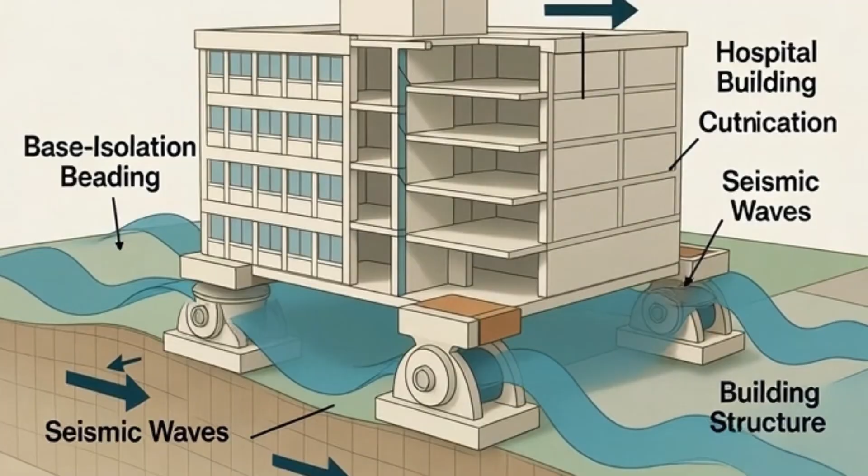Japan is often described as the safest country in the world when it comes to earthquakes. Its cities are filled with flexible skyscrapers. Hospitals sit on base isolation systems. Buildings are designed to move, not to break.

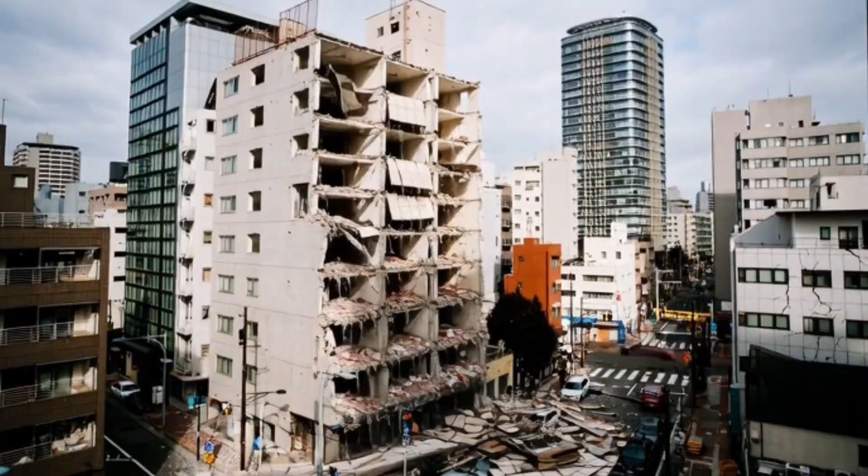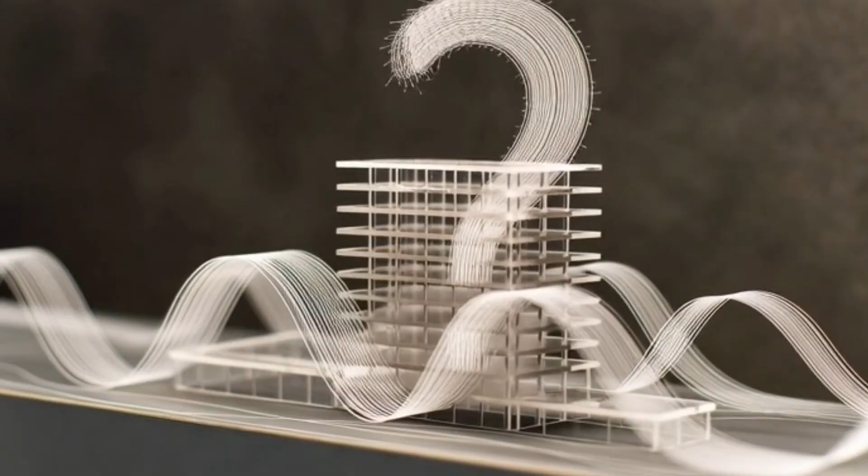And yet, after major earthquakes, we still see damaged buildings. We see hospitals that cannot operate. We see infrastructure that stops working. So this raises an important question. If Japan has some of the most advanced earthquake-resistant designs on Earth, why do these systems still sometimes fail?

This video is not about blame. It is not about disasters. It is about engineering reality, the limits of design, and what Japan teaches us about how failure really works.

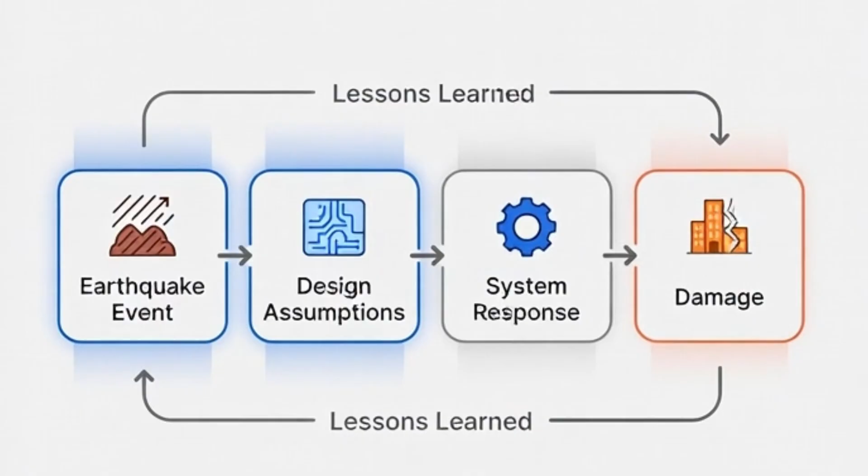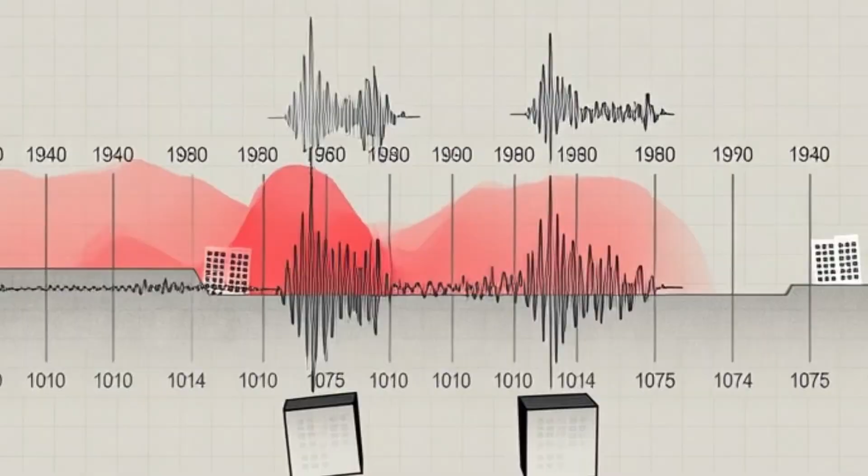Japan sits at the intersection of multiple tectonic plates. Earthquakes are not rare here, they are a regular part of life. Over the last century, Japan has experienced some of the most powerful earthquakes ever recorded. Each one left behind damage. But more importantly, each one left behind data.

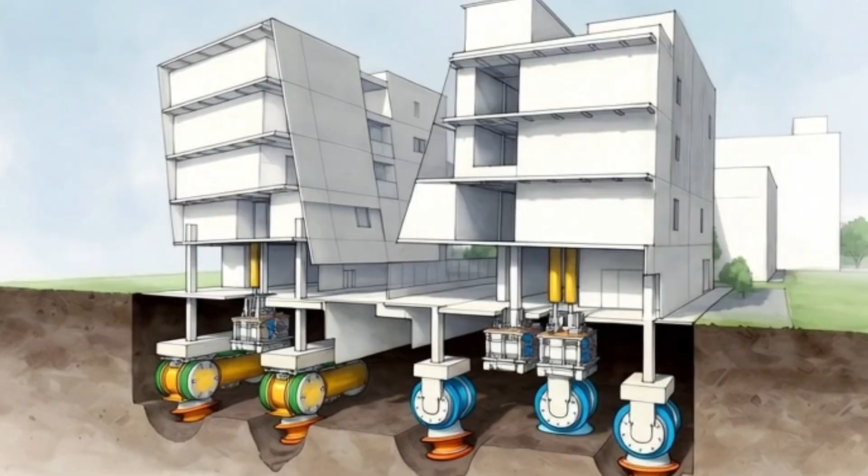Japan chose a different path from many other countries. Instead of trying to avoid earthquakes, Japan chose to engineer for survival. That decision shaped modern earthquake engineering around the world. But leadership does not mean immunity.

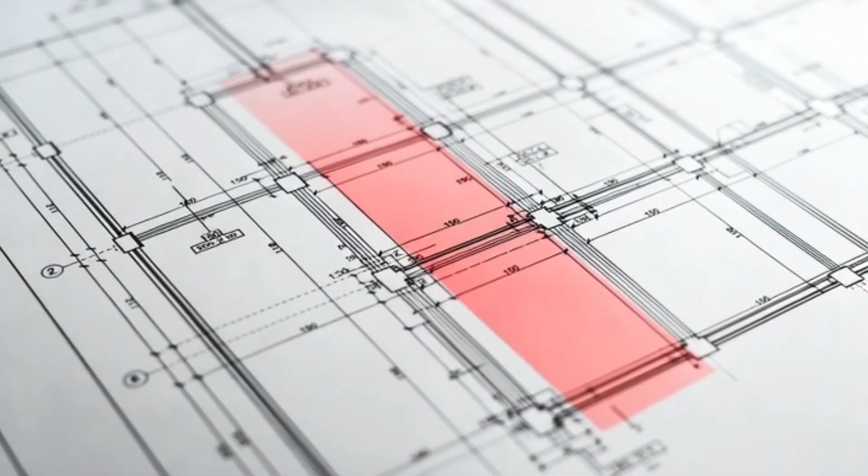Many people believe earthquake-resistant buildings are designed to remain undamaged. That is not true. Earthquake-resistant design does not aim for zero damage. It aims to prevent collapse. It aims to protect human life. It aims to give people time to escape.

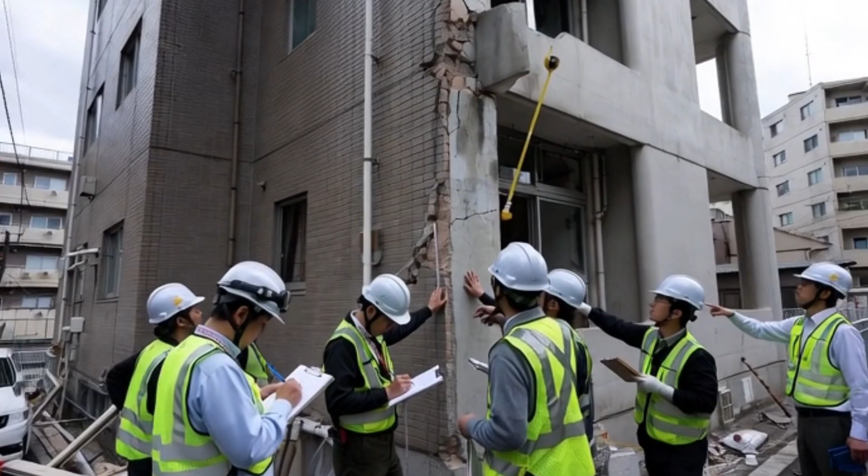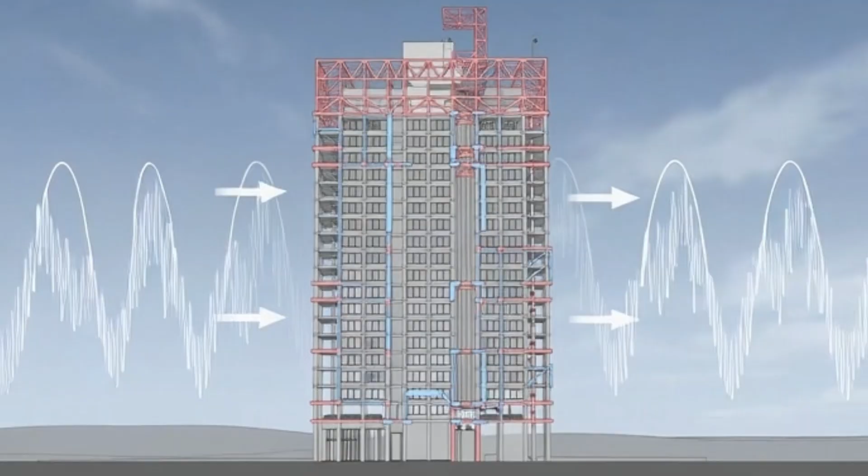Engineers accept that damage will happen. What matters is how that damage happens. Buildings are designed to bend, to absorb energy, to deform in controlled ways. Cracks are expected. Movement is expected. Collapse is not. This philosophy is written directly into Japan's seismic building codes. In simple terms, earthquake-resistant does not mean earthquake-proof.

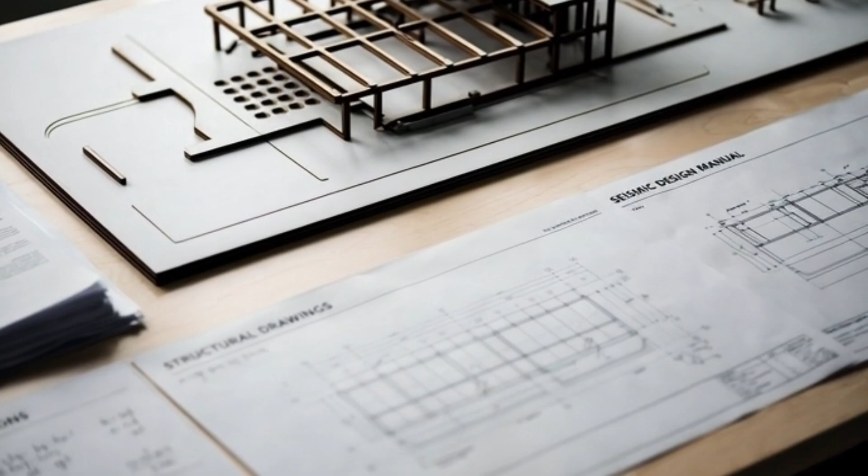Every engineering design is based on assumptions. Seismic codes define a design earthquake. This is an estimated level of shaking based on probability. But earthquakes do not follow averages. Some last longer than expected. Some release energy in unexpected patterns.

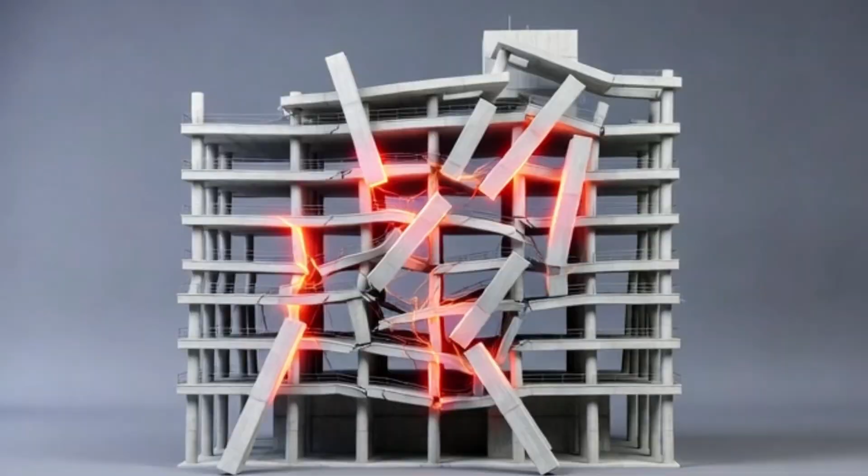Some exceed historical predictions. When that happens, buildings experience forces they were never meant to handle. This does not mean the design failed. It means the event exceeded the design envelope. Engineering manages risk. It does not eliminate it.

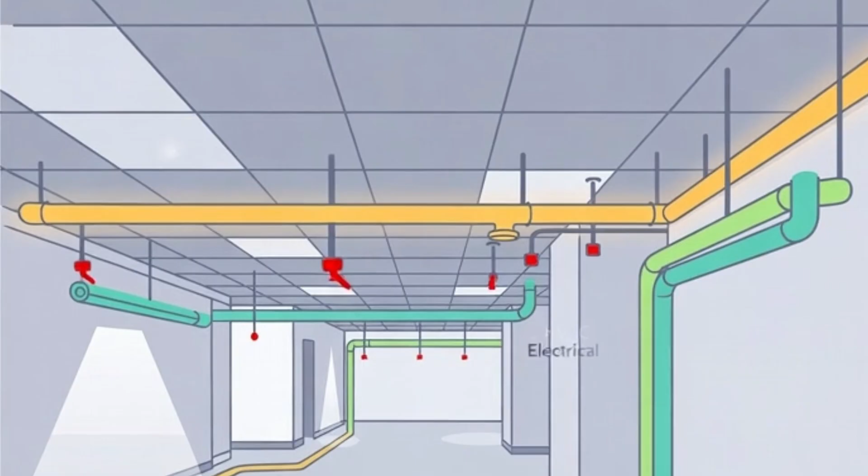After major earthquakes in Japan, many buildings remain standing, but they are still unusable. Why? Because non-structural systems fail. Ceilings collapse, pipes rupture, electrical systems shut down, medical equipment shifts or breaks. Structurally, the building survives. Functionally, it fails.

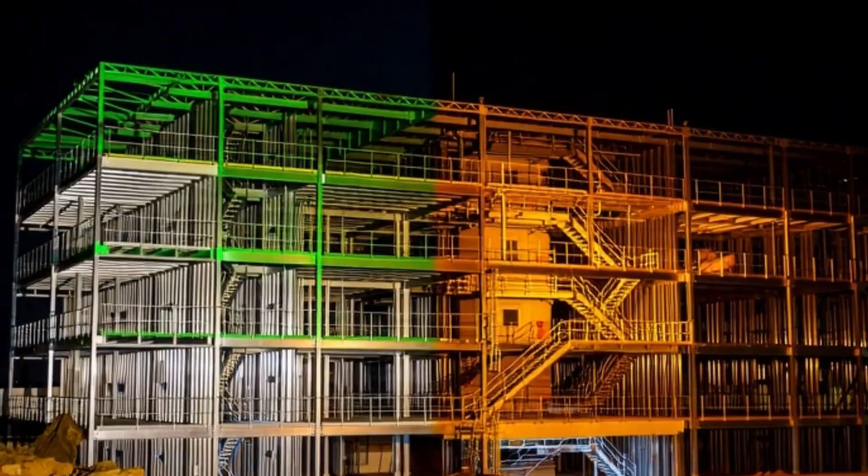Hospitals are a clear example. After the 2011 earthquake, many hospitals were structurally safe, but they could not operate. Earthquake-resistant design protected lives. It did not guarantee functionality. This distinction matters.

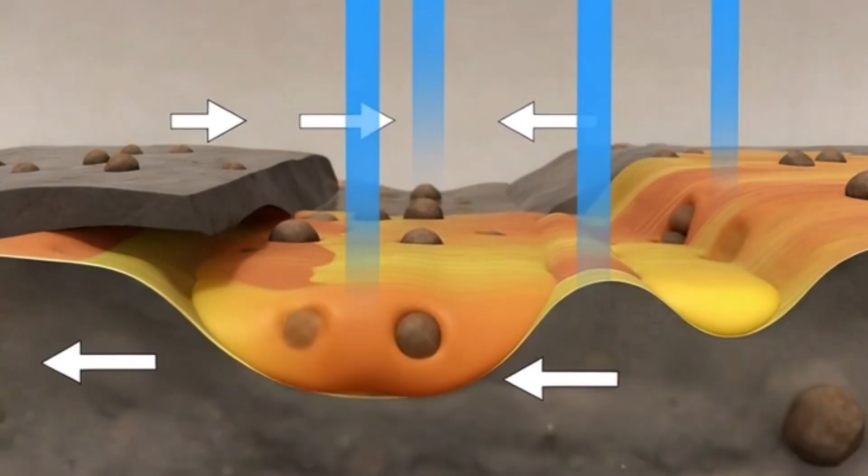A building does not stand on engineering alone. It stands on soil. And soil can fail. Many Japanese cities are built on soft ground or reclaimed land. During strong shaking, saturated soils can lose strength. This is called liquefaction. When liquefaction occurs, the ground behaves like a liquid.

Foundations sink, buildings tilt, pipes break underground. In 2011, many well-designed buildings suffered damage because the ground failed first. No structure can outperform the soil beneath it.

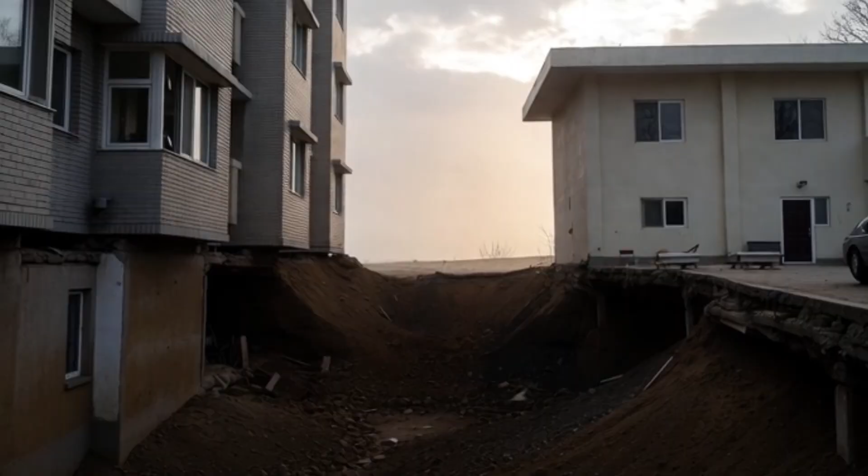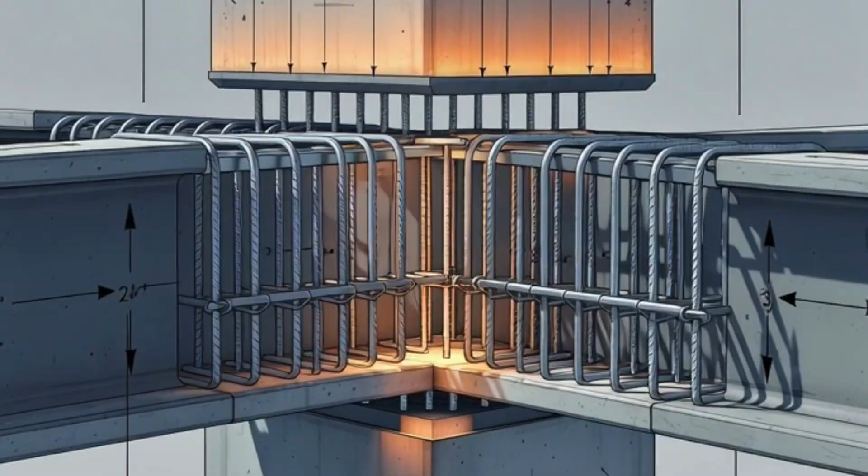Design alone is not enough. Earthquake resistance depends on details. Reinforcement placement, connection strength, construction accuracy. Small mistakes can create weak points. Under seismic stress, those weak points fail first.

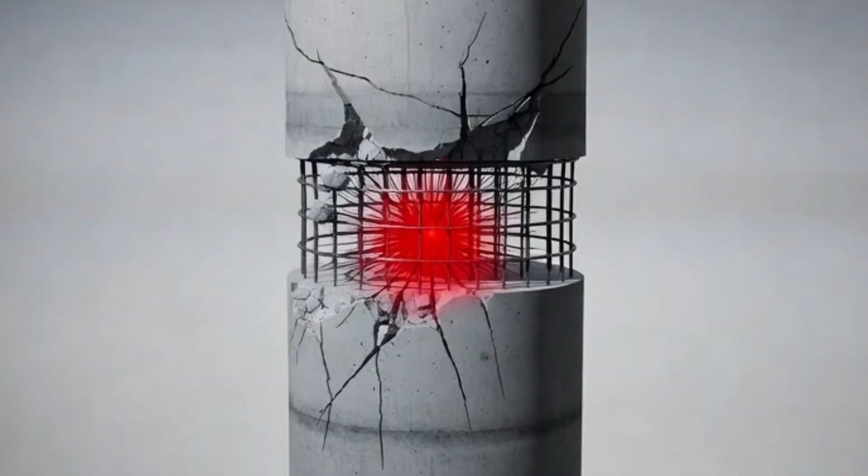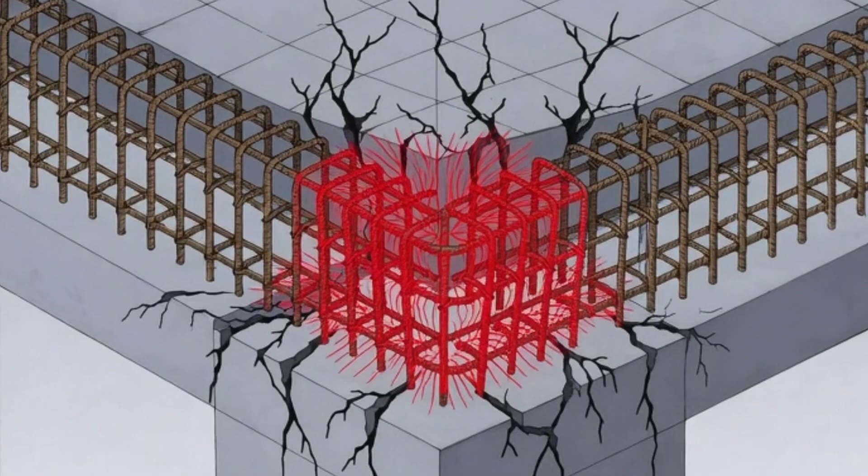Post-earthquake investigations repeatedly show this pattern. The concept was correct. The execution was not. This is why inspections, supervision, and quality control are critical. Earthquake engineering is not just theory, it is practice.

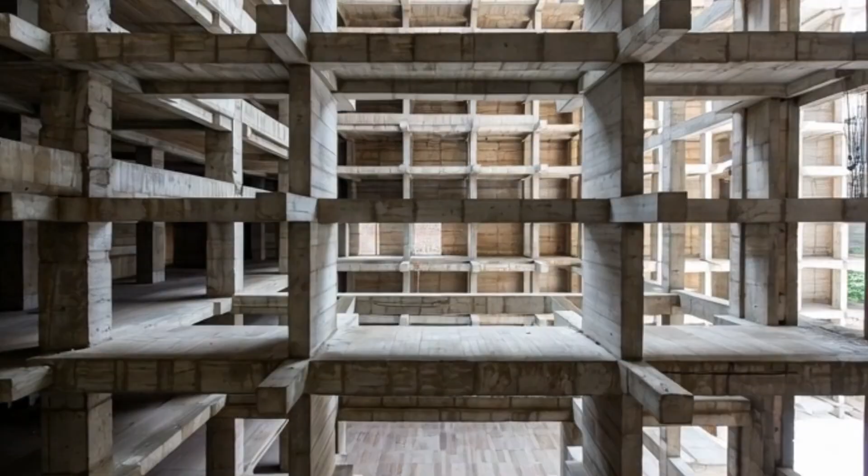Not all buildings in Japan were designed under modern seismic standards. Older structures reflect older assumptions. Before major code revisions, many buildings lacked proper ductile detailing. They were strong, but not flexible.

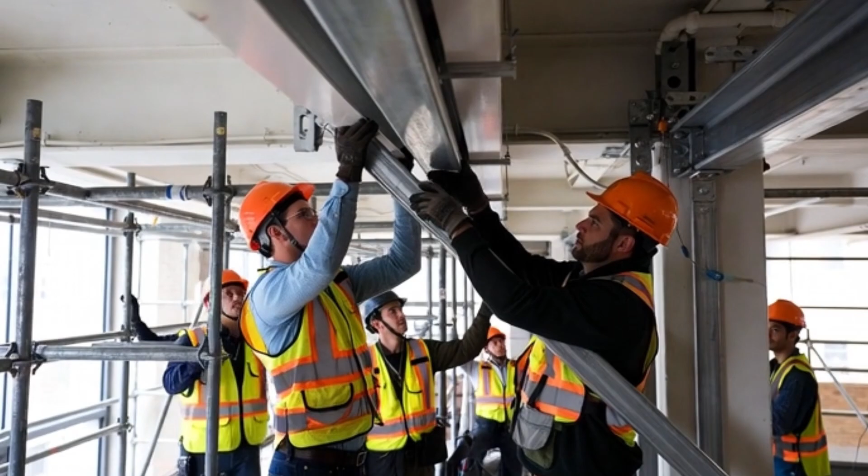Japan has invested heavily in retrofitting, but retrofitting takes time. As a result, failures often occur in legacy buildings, not in modern ones. Failure patterns are often historical, not contemporary.

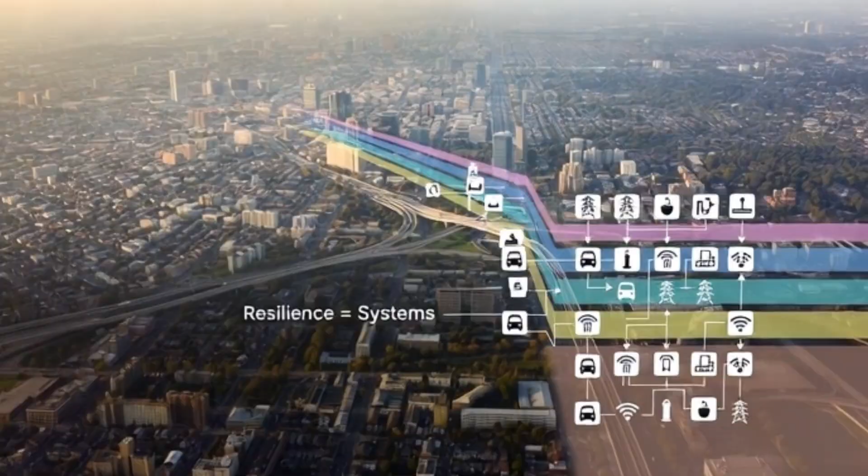Buildings do not operate alone. They depend on electricity, water, transportation, communication. During major earthquakes, these systems can fail together. Even if a building survives, a city may not function. This is called cascading failure. Earthquake resilience is not just structural, it is systemic.

To the public, failure means collapse. To engineers, failure is more complex. A building that cracks, leans slightly, and requires repair may have performed exactly as intended. Its job was to protect life, and it did. Understanding this difference is essential. Earthquake engineering is about survival, not perfection.

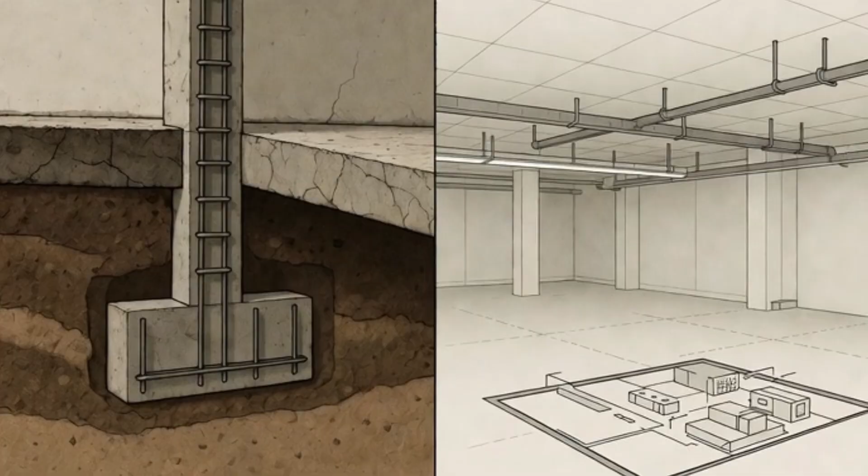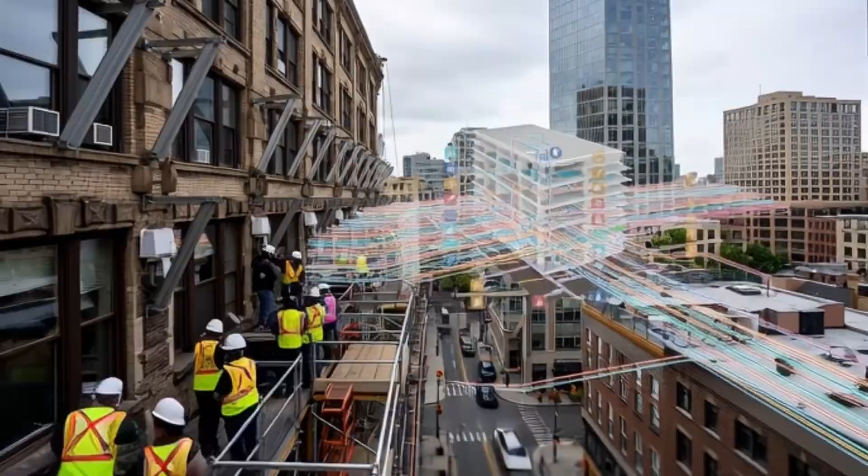Japan's experience changed global engineering. It taught us to focus on soil behavior, protect non-structural systems, retrofit older buildings, design cities as systems, not objects. Failures are not shameful in engineering, they are information. Each earthquake improves the next generation of design.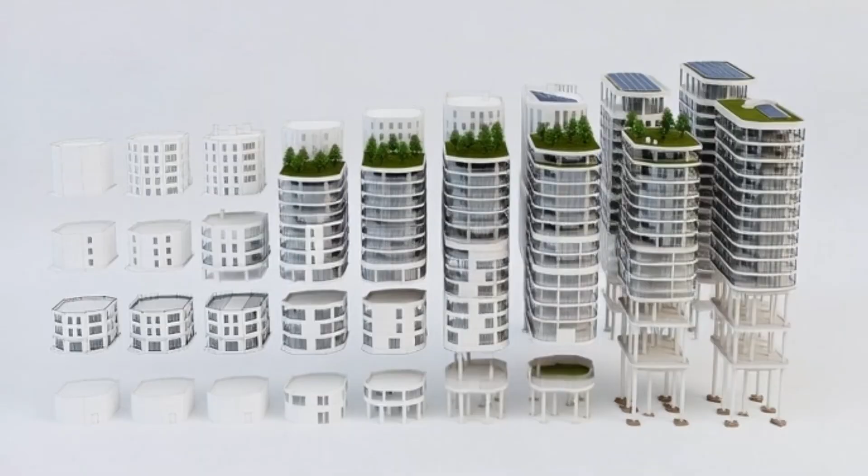Earthquake-resistant design sometimes fails because earthquakes are complex and uncertainty cannot be eliminated. Japan does not design buildings to defeat earthquakes. It designs them to negotiate with nature. And in that negotiation, saving lives is the ultimate success.